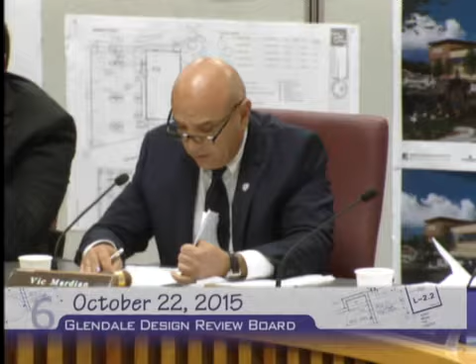The project site under discussion right now would be for a particular commercial development proposed at the corner of Pacific Avenue and Burchett Street, located at 707 North Pacific Avenue. The site is currently developed with a one-story commercial restaurant building, formerly known as the Marie Callender's, which has been vacant for a period of 2 years.

The proposal consists of demolishing the existing restaurant building and constructing a new 12,900 square foot building plus approximately a 1,600 square foot mezzanine. It'd be a drugstore with a drive-through pharmacy on a 1.1 acre site currently zoned C2 Height District 2.

If you don't mind, I'm going to go up to the board. There is an aerial picture here, and apologies because the dais is under construction - we do not have the computer system or the screen up available to show you an aerial image of the project site.

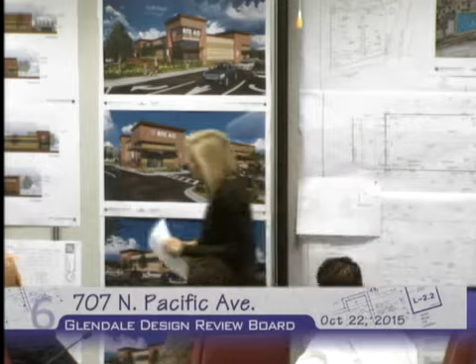You'll notice here's one site plan, and this perhaps is a little bit better of a site plan here. The restaurant closer towards Burchett is being replaced, obviously, by the Rite Aid.

The existing surface parking lot will remain as is. There are two-way driveways on Burchett providing access to the existing parking lot. The parking lot will be reslurried and restriped.

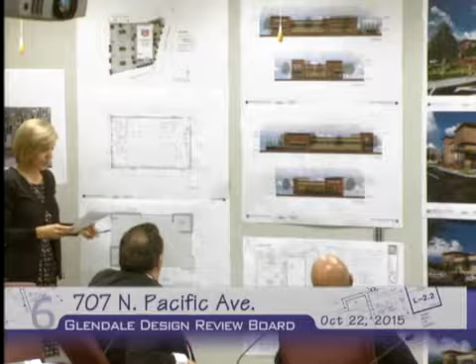The trash enclosures and loading dock are located to the south of the building along the rear, so essentially only the freeway on-ramp would see the trash enclosures and loading areas. That's specifically geared to provide all of the secondary access points, or the traffic and trash collection, away from the residential developments along Burchett.

Working in conjunction with the architect and the project team, staff has at this point in time developed street improvements along Burchett, which would help to alleviate the traffic flow and circulation of the use. Again, this is in regards to, I'll take a step back, there have been issues with traffic patterns on Burchett.

The applicant is now widening Burchett to provide a center turn lane traveling westbound on Burchett into the parking lot, and also widening Burchett to allow for a right-hand turn lane traveling eastbound on Burchett, south on Pacific. So these would help fine-tune the circulation and traffic flow both into the project site and out onto Pacific Avenue.

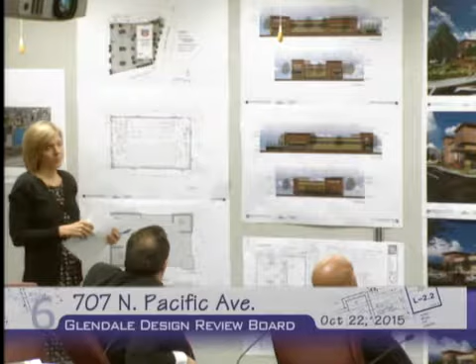Where is that occurring? Is that occurring basically to create somebody going westbound to be able to turn into the parking lot? Correct. So there is a small-scale shopping center that includes a Starbucks directly north of the project site.

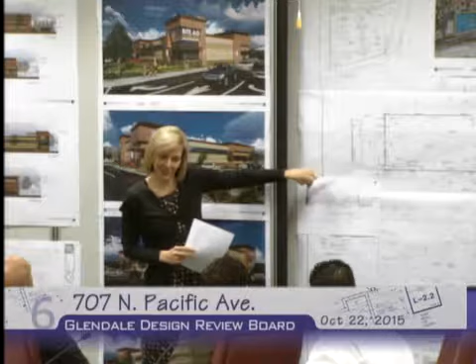If you'll notice here, and it's best seen at this location, what is being done currently is just one westbound, one eastbound lane. What they're doing is widening Burchett to allow for a center turning lane where cars traveling westbound can wait while traffic passes, still heading westbound, past the cars waiting to turn into the existing parking lot.

Any other questions regarding site planning or the circulation and public right-of-way improvements? How much actual dedication has been done with the realignment? It looks like it's not a straight line, so there's some curvature and all that.

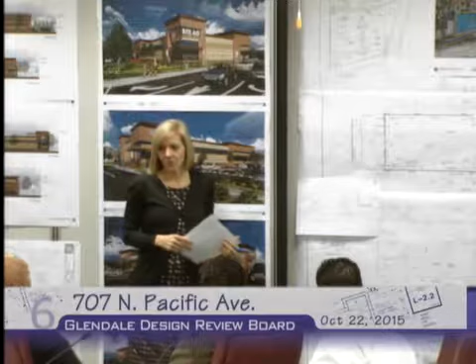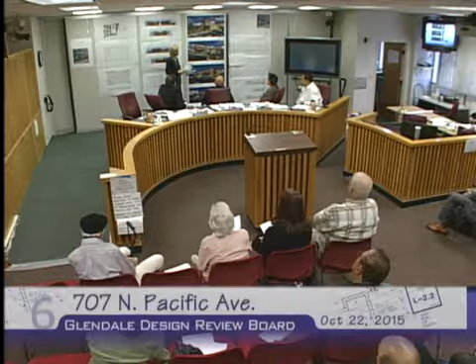It varies. So how much sidewalk do I have? How much setback do I have there? There is a 10-foot curb face to property line dimension, which would allow for a 5-foot sidewalk. And then they are required by code to provide an additional 5-foot setback along Burchett, so total from curb face is 10 feet.

To the property line, it would be 10 feet. It would be 15 to the building. Okay.

And the dedication that was provided for the turning lane, was that a voluntary enlargement, or was that something the engineering department basically asked for? That was in conjunction with engineering, with traffic and transportation. It is somewhat voluntary, working together with traffic and transportation. This is the plan that was ultimately brought forward.

So the island is actually in between those two driveways serving the facility? No, there is no actual raised island. It's just striping then. It would be just striping, correct?

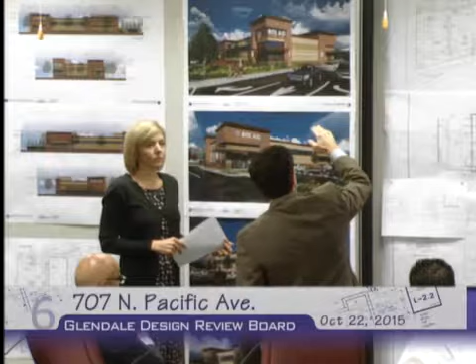Okay, all right. And this queuing lane that's created, at some point it turns into a left turn only, and then at some point it's to provide queuing as you're going westbound. So is it one of those S-shaped ones where half of it is for the queuing for folks traveling westbound to turn left, and the other half is for folks traveling eastbound to turn north?

Well, actually, the center lane is primarily for the traffic that is going to be entering and making a left-hand turn into the project site. Past the property, that center lane essentially goes away, and traffic is back to one lane traveling westbound, one lane traveling eastbound, with no center lane.

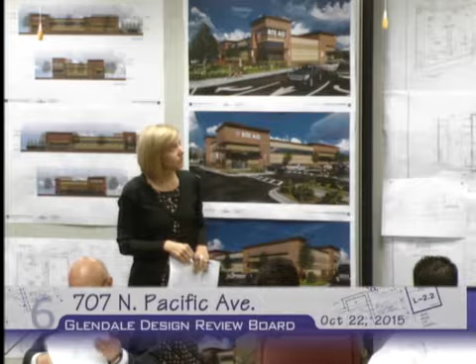So the dedication is solely on the subject property. You can see that the site plan almost shows three lanes once you go past the building.

I'm sorry, do you have the pointer? Do you mind?

Maybe the traffic consultant could answer these questions.

This turns left, and then this goes straight, and then this turns right. At some point, this portion becomes the queuing area for cars to queue up in the middle to turn left. And then all this leaves us with enough room for cars going westbound to go past. The applicant is also providing a right turn lane traveling eastbound and then turning south on Pacific.

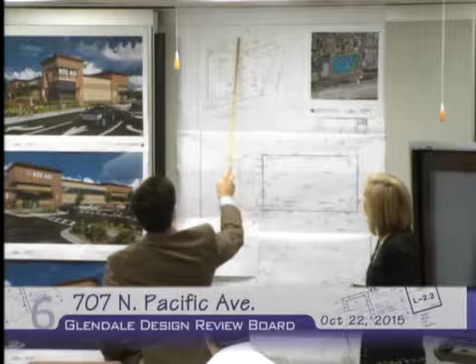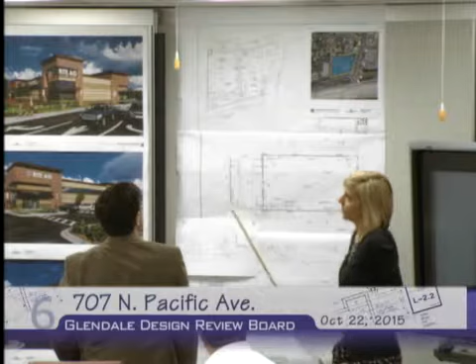This curb face here is this curb face. And then at some point, where the parking is the parallel parking, this parking would be right here. So this would be the Starbucks at this location with the seating, and this is the on-street parking. Then you'll notice it drops down, and then you have your single-family residential neighborhoods.

Can you clarify this for me? We're creating this right turn lane going south. Then we have this lane going straight. Then we have this lane going left. So where is the queuing occurring? Because this shows left lane arrow.

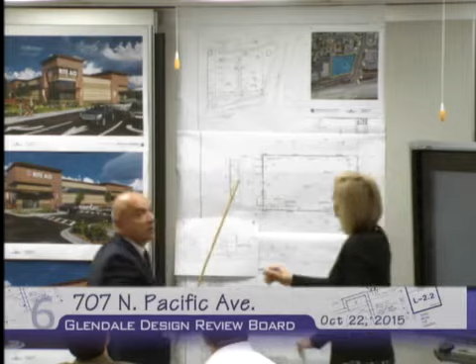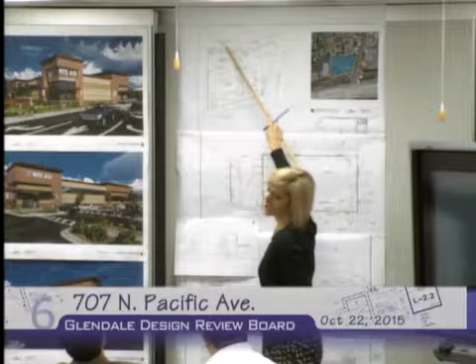The queuing is in line with that left turn lane. So if they're traveling westbound, they'd be going west, into this lane, waiting, turning left, south into the project site. It's an S transition at this location. How many vehicles can queue in that queue pocket?

That is a question to be answered by traffic and transportation.

I'm going to go back to that other question I had. I'm looking at this plan. It says 5-foot setback, then it's almost a 5-foot sidewalk. Where does the 15 happen? Right up here, unless maybe I'll ask the applicant. This looks like 5 feet, not 15 feet.

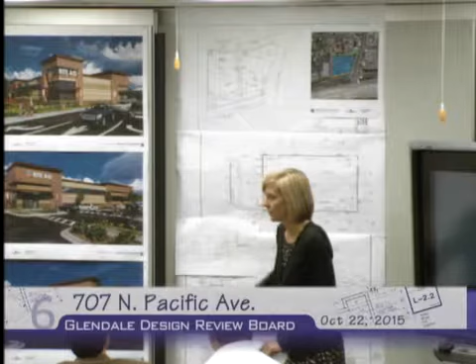It's not 15, then, you know what, you are correct, and I apologize. That's just a 5 foot setback to the front, to the property line, and then a 5 foot setback to the building. So there's not much dedication has occurred there. Most of the dedication has occurred at this location.

Any more questions? I'm going to look to the civil engineer to make sure that's the correct information. Any comments? Any other questions regarding site plan or the public right-of-way improvements? No? All right.

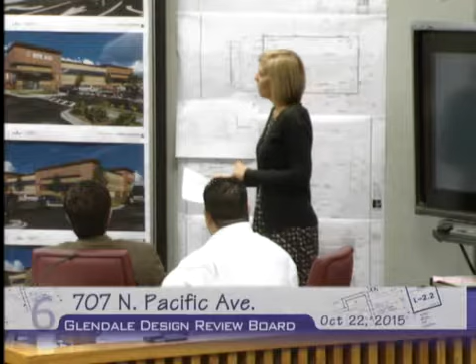The next scope within the staff report is the mass and scale. As you notice, it's a one-story building. The highest point would be this tower element at 30 feet high. The remaining parapet varies to the lowest point, which would be 22.9 from grade. This higher point specifically addresses the Pacific and Burchett corner. In terms of mass and scale, they focused the tallest portion of the building at the corner and varied the flat roof lines throughout the rest of the project, with the corner elements being taller and a lower parapet between the corner elements.

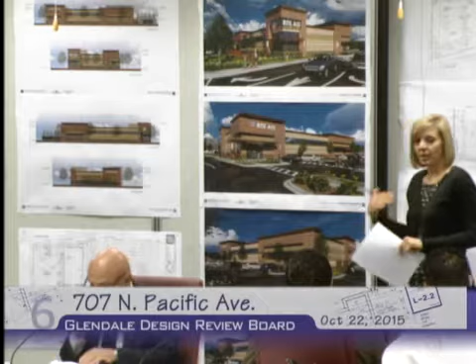There is a two-story commercial building directly to the west of the project. This mass and scale of the proposal is compatible with not only the adjacent commercial building, but also the single-story commercial buildings along Pacific Avenue. Because this is a heavily trafficked thoroughfare, the mass and scale is appropriate for Pacific Avenue, and then it transitions down into the single-family residential neighborhood along Burchett.

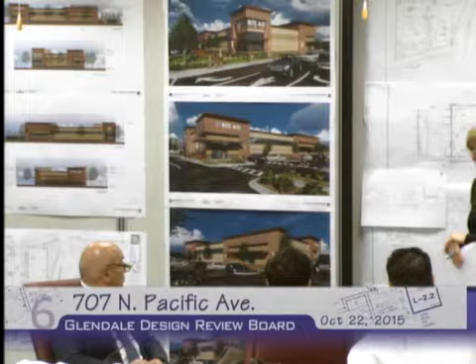Is there a question for Stone? Okay.

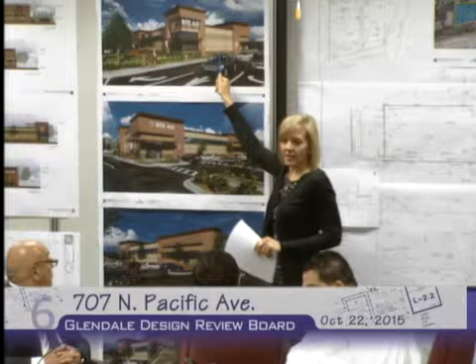The overall design of the project also helps in terms of breaking down the mass and scale. There are variations in plane and changes in material. The corner elements are treated primarily with brick facade. You'll have the walls and banding in between the brick corner elements treated in a horizontal banding type linear system to break it down and focus the eye on the horizontality of the project. The elevations also include vision glass and spandrel glass to soften the look. With this variety of materials and treatments and facades, the mass and scale of this rectangular building is broken down. The last topic in the staff report was design and detailing.

Again, what you see here is being presented by corporate Rite Aid. It's somewhat of a contemporary rectilinear building utilizing brick veneer, concrete block, spandrel glass, and vision glass.

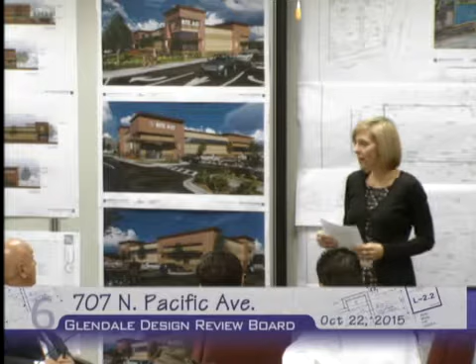They are including as the primary aesthetic these corner elements, somewhat more towered, that are capped by bands, which are also seen along the awnings. You'll notice that above the door spans and above the drive-through windows, you'll have the metal capped awnings. Overall, all four sides are treated in a similar fashion, so there is consistency throughout the entire building.

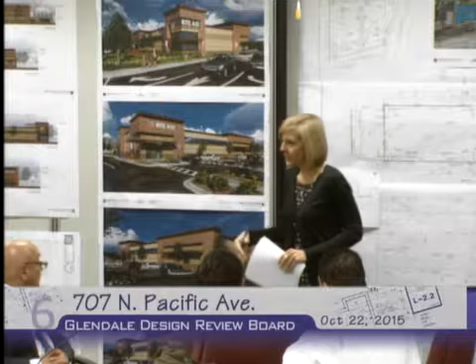The one item staff would like to note, and what we recommended as a condition of approval, is to take a look at the design and detailing of the front entryway. This front entryway faces Burchett. It's on the interior so there is access both from the parking and from pedestrians. But based on the overall look, there could be a little bit more design around the actual storefront system at this location. Other than that, staff had no other comments regarding the site plan, the mass and scale, and the design and detailing of the project.

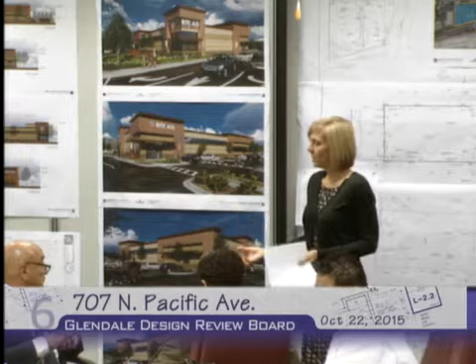Because the building was over 10,000 square feet in size, an environmental review was done. Staff prepared an initial study, which was circulated for the 20-day comment period from September 28th through October 17th. During that time, staff received 2 comment letters. Those letters were forwarded to you, and staff prepared responses to comments and forwarded you the final negative declaration for your consideration. The board has to consider the environmental review prior to making a determination on the actual project itself.

For the record, the applicant held a neighborhood meeting on the project site on September the 29th, so there was an opportunity for the applicant and the neighborhood residents to meet and review the actual proposal. That concludes staff's presentation. Obviously, there are many more details in the staff report.

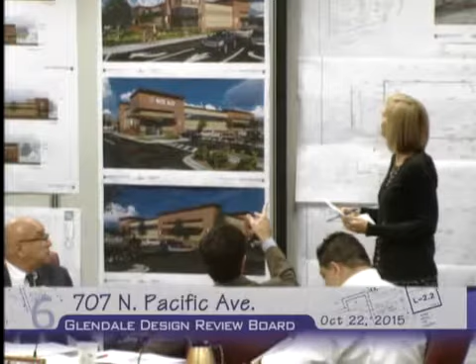So, is this a 24-hour facility? This would be a 24-hour facility, yes. And as far as the lighting of the parking lot, is there a plan to show us what that looks like? I will take a look at the project site, but all of the lighting as required by code must be shielded and turned away from any adjacent uses. Okay, so it would be directed onto the parking lot only.

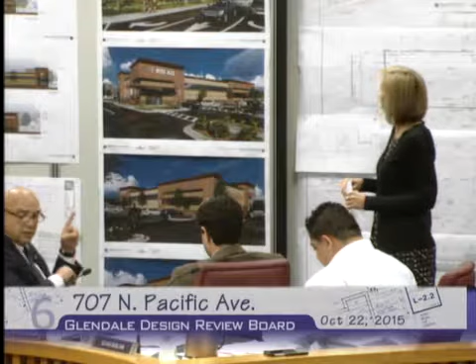Do we have a detail of the awning? If there was not one in the packet, I believe there were some details in the last few pages of your packet. I'd be more than happy to take a look. I'm looking at what I guess is their civil plan - those biofiltration basins. It looks like they're planters in some areas, but is that a drainage device they're required to have? That occurs in those 2 planters, especially the one up top there.

We can ask the applicant to clarify, we'll probably verify that with the applicant. All right, thank you very much.

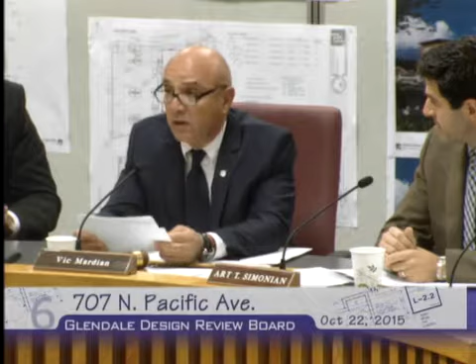Mr. Chair, on that note, I have a prior commitment to go to this evening, so I will be recusing myself probably around 6:45 or so. So I'm glad you're mentioning the 3-minute limit, and it'd be nice to go through the comments as quickly as possible. Okay, Mr. Simonian, we'll try to be out of here, and if not, we'll make it work somehow.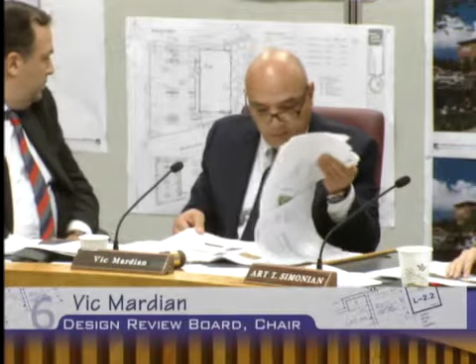Certainly. You turned in a material sample, but on the packet that I got, you showed split face on all of them except - actually, you show split face on all the CMUs, but I see the sample doesn't show it as split face. It's a function of what we can get from the block manufacturer at the time. But all the block is split face, integral color, and we've been very deliberate in our construction documents. You could see the lower sheet there, defining each row, each layer, so there are no mistakes.

This treatment, I appreciate this treatment. I've had experience with the roof treatment there. The material in between this, the cap or the band, is that metal too? It's metal, yes. It's all a metal coping, with a little recess there to create a nice shadow line.

But I'm looking at the roof plan. I saw two different roof plans. These are just parapets, wrapping around, thickening them, doing a parapet. I didn't see a volume of a roof there, or a tower, an actual tower.

Well, what we're doing is we raised all the corner elements. We figured that's where we're going to put all the mechanical equipment, so we don't have to create any false screens. The screening is part of the architecture itself, and you can see where we located all the HVAC units.

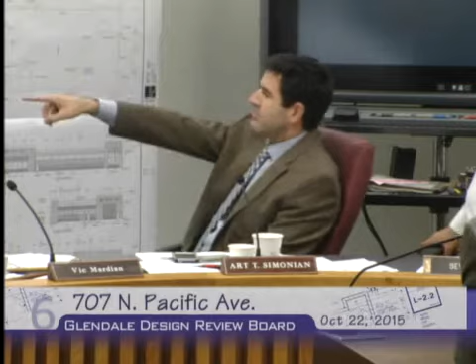There's a roof plan here, and then there's a roof plan at the lower left. Yes. The lower left actually shows actual parapets that continue within the roof and are depicted in the perspectives, whereas this roof plan doesn't show it. So which one is correct?

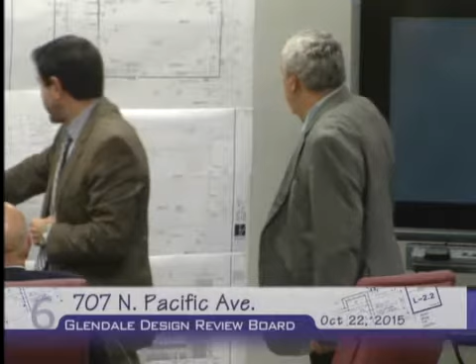You can come up, sir. I'm not sure what - I think he's talking about the middle of construction. Is this what you're talking about? Yeah, these parapets here. You can see on the lower left, the treatment here, this wall goes further, which then makes this perspective accurate, this is the view facing Pacific.

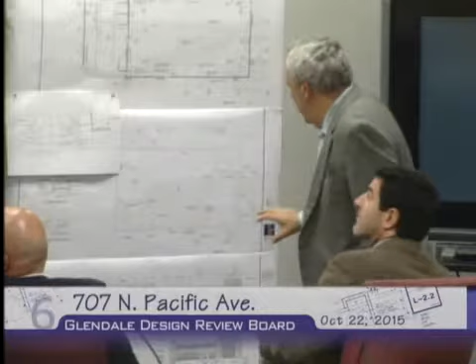And which one is correct, the roof plan or this? This is it. You understand, those were our schematic design drawings, and this is the construction document. So you are correct, we would extend that.

So which drawing should we look at today - ignore the roof plan? For the roof plan, this is the construction document, so look at this one. What else should we ignore? That was a design drawing. Are the top drawings above the roof plan schematic as well? Again, those schematic drawings - yeah, this is the site plan, this is the actual floor plan.

This shows the actual fixturization inside the store, with the exception of the loading opening. You have an opening at the back, but the loading area isn't shown there. Well, this is correct - this is the loading dock door and the access door.

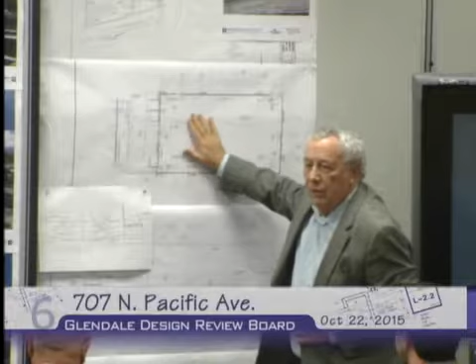Again, those were schematic, and now we want to make sure that the plan we approve—whatever this is the one you take to the bank, so to speak.

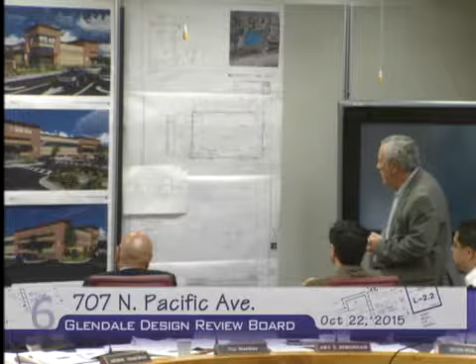And what do you propose? You mentioned the idea was to create more of a true tower element, and the intent was for that tower element to mask and screen the HVAC equipment. But that's the latest roof plan, and it certainly isn't in that spirit. So what do you propose, or have things come up that aren't indicated on this drawing?

We just need to extend some of these legs up this way, and we'll take care of that.

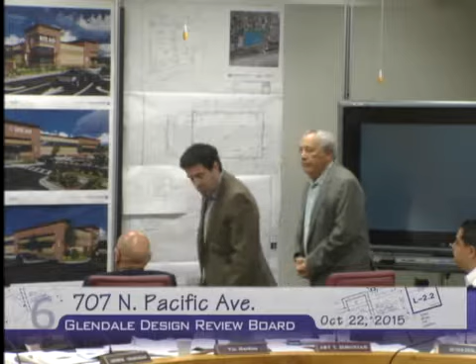This general coping that's occurring, is this with brake metal? Yes. And is this brake metal as well, inside? Yes, yes. And is that a Rite Aid corporate finish they're going after, or is that something the architect has come up with?

It's what we've come up with. If I'm not speaking out of turn, Rite Aid's prototype has changed a lot—it's a lot more contemporary. You know what most typical drugstores look like, I won't mention other names, but in general it's a knockoff Spanish style with huge entry volumes, awnings over plaster walls, foam cornices. We wanted to create a more solid-looking, clean building. Rite Aid is extremely pleased with the design.

Have you considered other coping designs? In a way it seems somewhat unfinished, so I wanted to know if you've considered other thoughts, or if you have other thoughts. To be honest with you, we designed it and we're very pleased with it. I'm not trying to be disrespectful, but that's the way we felt it should be.

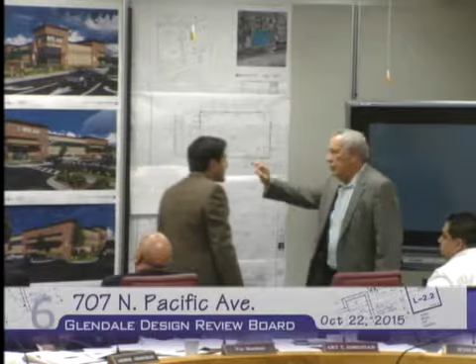And that top perspective, this white Rite Aid—is this hanging off the top? It's attached to steel tubes, and we have that all detailed in the construction documents. That's kind of our focal point, as Valia said—that's the corner.

And then there is a void space behind? There is, yes. So there's this tube steel that turns the corner, wraps around the Rite Aid logo and attaches to it. We're permitted one sign per elevation, but this way we're able to get both the Rite Aid logo and the sign itself in that one location. We have all that detailed in our construction documents—it's anchored back to the wall, and of course to the sides.

Do you have those here by any chance? I don't.

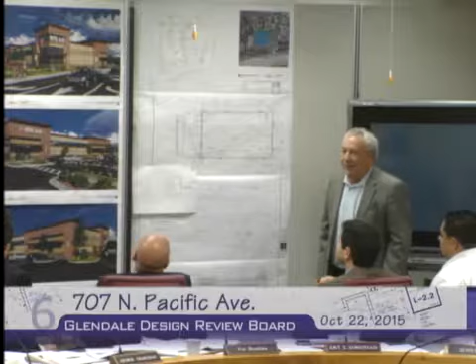Since we're talking about coping, I'm sorry to jump in—you have this detail here where you're recessing the coping, and it's different on each elevation. Is there a reason for that? We see it happening in some places and not others. We have two different towers, certain volumes. Some of the towers are different width, different height, different proportion, so what's consistent is the top piece. We're trying to vary it a little bit—the entry tower is a different statement than the other towers because that's our focal point, but the detail itself is consistent all around.

And what's inside the recess—is that metal as well? It's just lined with metal, same metal. Thank you for asking—there's no exposed plaster or anything on this project.

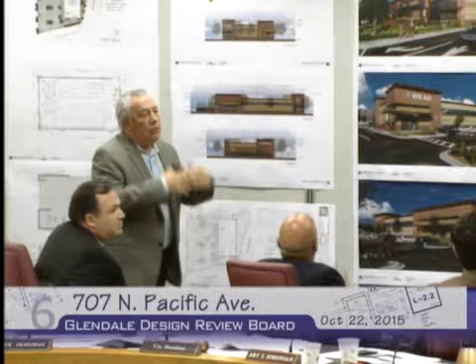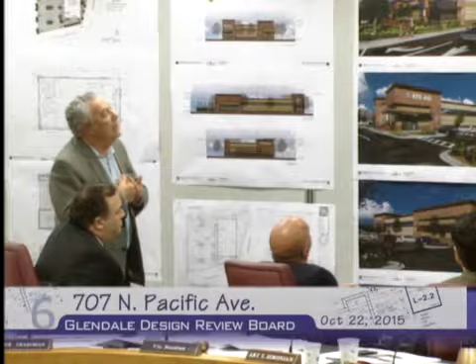About the corporate image, because I've seen similar buildings in other parts of the city, other cities—is this the material, the theme of the material that Rite Aid has? Yes. We developed the image design for this, but their latest prototype is about brick veneer, and I hope I'm not speaking out of turn.

We have a representative here, a construction manager from Rite Aid. My questions were answered. Okay. Thank you. Thank you.

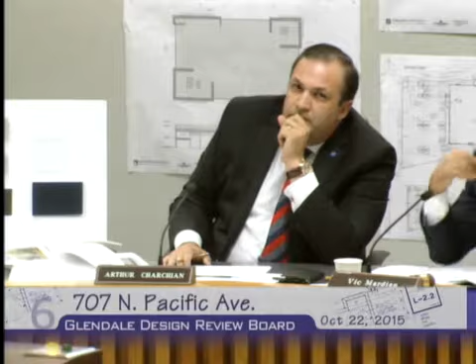I have a question, and I haven't had time to check it, but the water that's collected on the roof, is that directed to these catch basins, or is that directed solely to the rainwater system you're installing in the northeast corner? Yeah, the site's all surface drainage, but the roof is programmed to drain to the east into the infiltration basin at the northeast corner.

And that's a very large landscaped area, so it'll be easy to incorporate that. We'll also have a secondary outlet if that basin were to fill up. It'll get out to Burchett.

Mr. Valani, you have a question for the gentleman? I know it's not a straight line, but do you know approximately how many feet of dedication? Offhand, I know it goes from 0 to almost 11 feet as you get to the corner of the building. I would say maybe 400 or 500 square feet. I don't have the exact number.

Thanks. My last question is, are those the only ultimate locations for those biofiltration devices? Like I said, we have a couple smaller ones. But are those the only locations you can make it work? Yes, they're the site drains.

I understand the site drainage, but the reason I'm saying it, we have a huge parking lot. I'd like to get some mature landscaping that survives in those areas, because even the strip of the island separating those two driveways is very minimal landscaping. I can see it right here in this rendering.

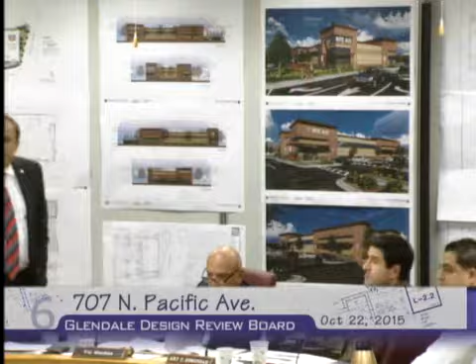Well, essentially, any time you have a driveway within a sidewalk, that creates a situation where people have to cross from one side of the driveway to the other. It's true of every market, gas station, theater parking, and shopping center parking.

So obviously, anybody turning in and out of a driveway has to yield to the pedestrians. I'm sorry, I'm not talking about people walking through the crosswalk, I'm talking about the entrance to the store - they are off in that area, walking in the sidewalk area, and they're on the property.

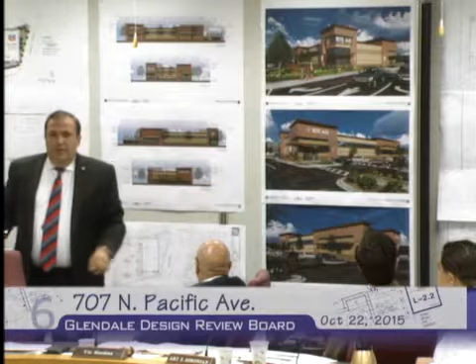A car driving west, there are two driveways. A car driving east on Burchett would probably use the first driveway, hopefully, right? The reason I ask is I've seen a lot of drugstores that for various reasons put these really ugly steel bollards in the front entrance, and we're dealing with a very visible, very close entrance to the street and to the turning radiuses of these cars. Unfortunately, Glendale has a very bad reputation for both pedestrian safety and these types of issues.

I can address that. Because it's an architectural feature - state your name for the record. Oh, I'm sorry, Albert Croft, again with Hirschman Architects. We are going to be adding a couple precast concrete bollards as protection for the entrance.

They haven't been shown on the plans yet. It was actually, frankly, a result of a meeting we had earlier this week. So they haven't been reflected, but we're going to update our construction documents. But again, you can be sure they're not going to be steel pipe columns - they're going to be nice precast.

So the answer to my question is you have considered the safety issues, and there are going to be some precast bollards in place to address any potential issues with someone maybe not making that turn properly. Absolutely. Okay, Jonna wasn't aware of that - it was literally a decision made earlier this week.

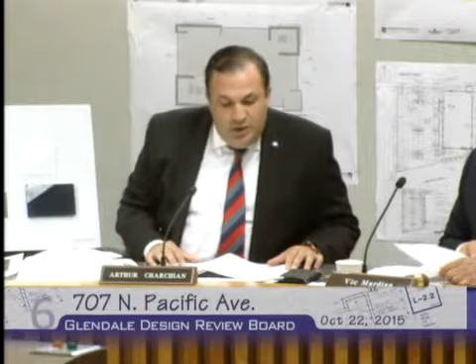I have a question for the parking consultant. Go ahead, unless anyone has more? I do, but I'll defer to your question as I formulate my next. I'm okay, sorry, go ahead. So my next question is in reference to deliveries and refuse pickup.

The deliveries are in the very back of the property, and the access point is one of the two driveways. In your study for the traffic flow that causes - because I'm assuming Rite Aid would get at least biweekly deliveries - have you thought about which of the two lanes they would use, and do you believe that will cause any traffic problems right in the parking lot?

I will defer to the architect in terms of the delivery entry into the parking lot, the delivery trucks, how they would maneuver in and out. That was designed as part of the site plan for safety reasons, because you want a delivery truck entering the parking lot to be able to back into the loading dock.

Do you have that? Well, yeah, it's in order - you have to come up here, sir. Croft here, I can address the safety aspect, but I just want to make sure to answer your question about the layout of the delivery.

In other words, I'd like to know - deliveries are going to come in one of those two driveways, right? And then the delivery trucks are going to have to back into that delivery bay. And so the same thing is going to happen with refuse, city refuse. I understand what's your question - we did provide, even for Rite Aid, the truck turning radius diagram.

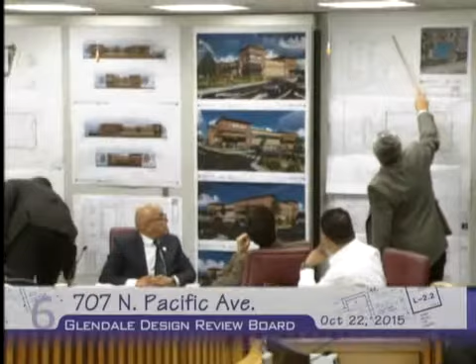This is not the architecture plan, but trucks would be coming in off of the intersection here, coming off the freeway. They would come in on the first driveway only, and that's what our traffic pattern shows. They come in here, turn in here, and this is even extra wide with a striped area with no parking. Trucks would come in, there's plenty of room, they'd back into their loading area, and they actually have the option to exit out the same driveway or this one. We can't control which driveway they exit, but they would absolutely come in on the first one, so that's the path of travel.

And we provided Rite Aid with a computerized turning template for large 18-wheelers, because we need to make sure that our design works, that our layout works.

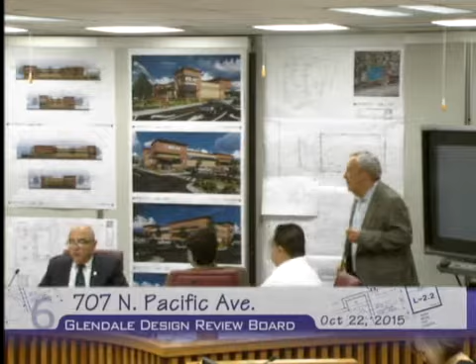You said there's a consultant or rep from Rite Aid here as well for specific questions? Each truck, depending on its size, they use the larger trucks typically for deliveries, and there are turning radiuses you can lay out on the site that tell you if the truck and trailer will be able to turn or back into a loading bay. So that was done by the architect, as is typically required for the design, to make sure they will be able to accommodate that turning radius in the lot.

And from a safety perspective, you have considered this in your study, considered that these trucks coming onto Burchett and entering the Rite Aid parking lot will not create a significant safety or traffic issue.

It is very typical. Majority of markets, Home Depots, or Rite Aids all have, at some point, to the extent possible, controlled delivery timing so that it's not at peak hours. I will not say it will never happen at peak hour, but in most cases they have delivery schedules that won't interfere during peak time when there's a lot of parking and pedestrian activity, and they'll be able to come in and out. The frequency at a Rite Aid of this size is not as many as you'd expect at a larger food market or supermarket with a lot more deliveries.

I'm sorry to harp on this issue, but I'm very concerned because Burchett is a very unique street. There's the very, I'd almost call it historic shopping center where the Starbucks is—I think it's a 1920s center that's seen many facelifts and has a unique cutout for parking that backs into Burchett, so you've got to be very careful there. You've also depicted an island, or at least an area demarked for safety purposes for that left turning lane you're creating.

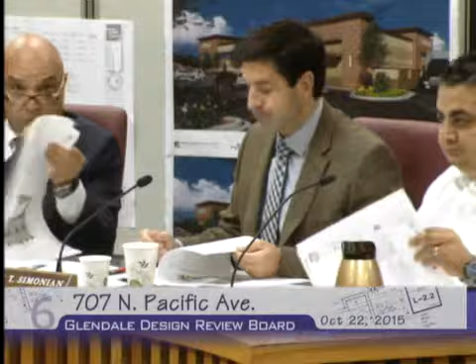I look at the plan, it's 14-foot ceiling height, Mr. Bowman. Yeah, 14 feet. You have a question, Mr. Simonian? Well, it was in reference to this ceiling. It's 14 feet, that's what they're proposing. To the drop ceiling? Am I correct? Maybe the architect can clarify, I'm looking at the sections.

Sheet 12. I'm not sure what that sheet says, but our typical sales floor would be 11 foot 10, so we don't carry that much volume. Because I'm looking at this elevation here, but we'll bring you back. I need to go to the public first, but we'll clarify that when you come back. I'll give you time, any questions?

I have one last question. We've heard of this being a prototype. Is there any other exterior design that Rite Aid uses other than this brick veneer?

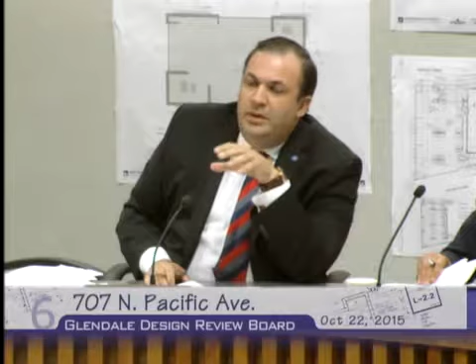Yeah, we use a variety of other architectural treatments, usually driven by the jurisdiction. If they had a certain theme they were going for, we utilize masonry blocks, split face as much as possible, because it's not only structural but decorative. If we're in a shopping center, we follow their theme, cover with stucco or plaster, all sorts of iterations, but we primarily try to go with the block and integrate the special architecture.

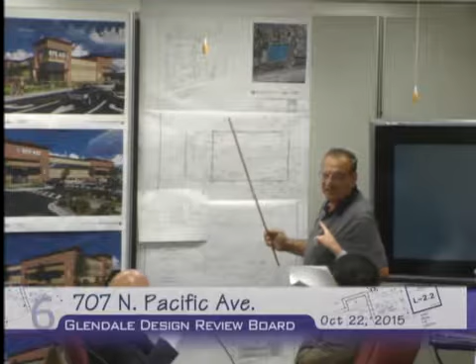Are you, sir, I'm sorry, you said hang a left, but that's the exit of the freeway. That's the exit, yes, but it's also the on-ramp to the freeway going this way. You got to go further down, under the bridge, you pass under. Still, you do need an extra lane in here. Yeah, you're right, you're correct. This is the exit. Where's the on-ramp to the freeway? Right here, you're on it, you're planning on it, okay, that's the on-ramp. But you do have this problem. That's a 5-foot setback he's got there. Yeah, I can see, very good.

Over here we can live with this maybe, but over here you need something to resolve this other problem. You need 2 lanes. If you don't have 2 lanes, there's no way you're going to be able to resolve this freeway.

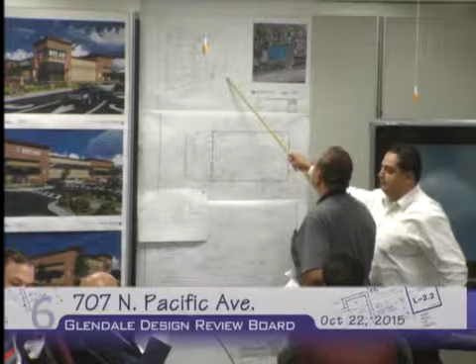Yeah, this is the on-ramp to the freeway. No, that's the on-ramp, but there's an on-ramp in the front. This is the 134 east, you exit the off ramp. The on-ramp happens somewhere around further here. Okay, okay, I lost that area. Are we done, Mr. Kazazian? Yeah, done. Sorry, I got turned around over here.

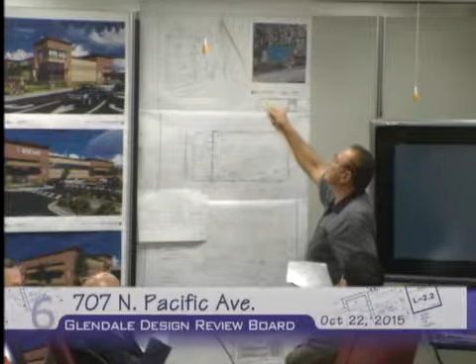But this area, you have to widen. Remember, Starbucks lost 7 parking spaces. They used to have 7 additional parking spaces, and the city took it away from them when they redid this intersection. That's why they're also short. Before, they used to have additional parking spaces that they lost. So they're strained, and you do have a problem with closing a business down. It's not going to help unless you resolve this intersection and give them more parking. Somebody has to work on that.

So your concern is the intersection, you have no issues with the design or anything? I'm not going to comment on design, that's your job to do. I'm not going to say anything about design. Traffic is my main concern, and getting on this freeway, it's almost impossible. In the mornings you can turn, of course, which you have no choice, into the on-ramp. I need to go to the other side, but look into that. Thank you.

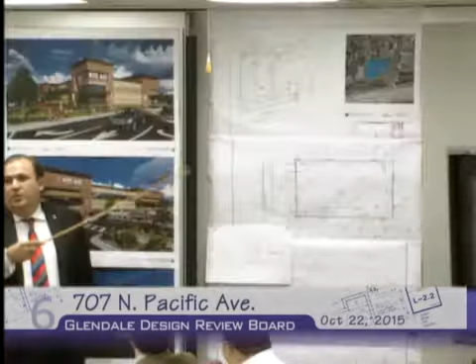For those in the audience and the viewing public, when we're talking about widening, it's not just here that we were talking about earlier in comments—you're also widening here 5 feet, correct? Yes.

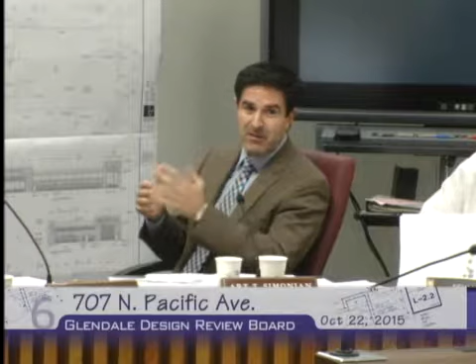Some of the comments that were raised by the other board members as far as providing more ample landscaping within the parking area certainly has some merits to it. And that comes with weighing in the fact that obviously with more landscaping that we provide, the more parking is going to be lost, et cetera. So there's a give and take with that as well.

The architecture in itself, though, I think seems a bit value engineered, I guess the only way I could really describe it. I think it could benefit that neighborhood and that intersection by having more materials, more color variation, and perhaps not as heavily weighted towards the brick veneer. That brick veneer in itself is a bit overplayed in the design.

But again, those are just design-oriented features, not so much what the overall layout, circulation of the project seems to be working. The driveways, the way they're oriented, seems to be working, coupled with the improvements that are going on or going to occur. And so the way the truck is accessed and the way the trash is accessed is done properly at the rear of the building, so it's not visible really to the neighborhood. And so circulation-wise, that works.

The driveway is again pulled away from the intersection, so as you're going northbound or southbound on Pacific, you're not going to see the drive-through. And that's kind of on the west side as well, which is nice, because you don't see the cars queuing up along Pacific. So all these things put together, coupled with the fact that now with all the dewatering regulations that the county has, that takes up that hard corner with where that depressed planter is, starts to kind of define the direction they've taken.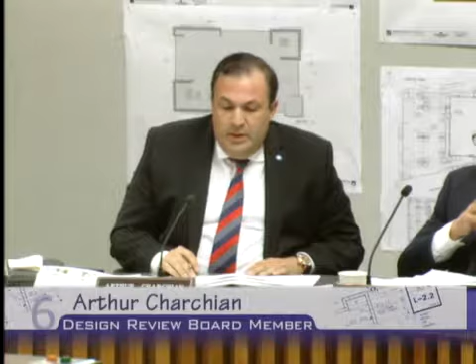I'll keep my comments short since a lot of what I was thinking has already been mentioned. I'm sensitive to the value engineering because I understand there's a certain cost effectiveness to these things, and also concerns with potential vandalism and transient-type issues that tend to plague these types of uses.

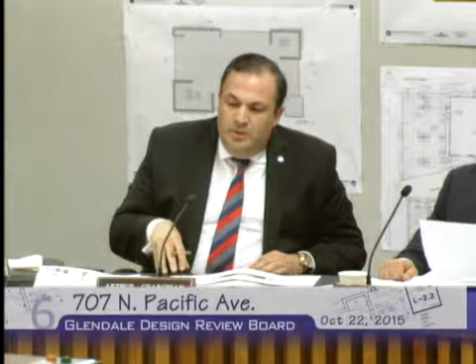I support the traffic studies. I wanted to make sure it was very clear that the additional 5 feet was there. The site plan overall, I think, would be a successful use. I'm neither here nor there on adding landscaping, though I think some shade trees would be nice for various purposes.

But my main concern is the overall look of the building. I can appreciate that Rite Aid Corporate has a certain look they want, but as the representative indicated, there are multiple variations Rite Aid is okay with in other areas. This just happens to be one of the ones they use, and the horizontal banding with the different color block—I have issue with. I don't think it's very appealing.

Regarding the comments about the location of this corner, a large number of Glendale residents and visitors will see this location as they drive by. I would welcome the applicant to reconsider the facade of this building. Since we're going in a direction of material change, and we're okay with the mass and scale, how do you want to approach this—do you want to see it come back, or do you want to suggest something?

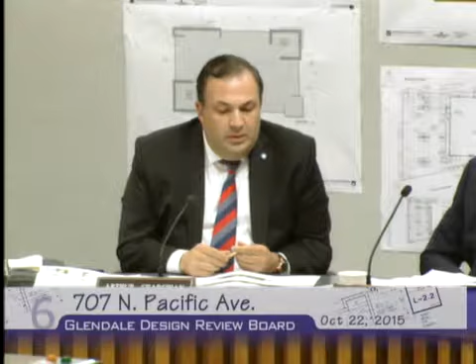I think staff could work with the applicant to curtail the facade. The suggestion of a composite metal facade instead of brick veneer is a good one. Breaking up the volume with something other than horizontal striping could be achieved, and those could be worked into conditions. I don't think a redesign is necessary unless you'd like to see one to know what that looks like, but for my purposes, I think staff could work it out.

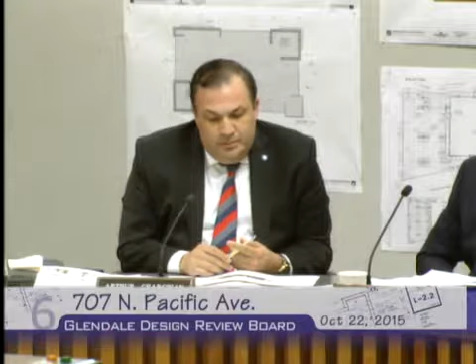Okay, thank you all. Anything else you want to add? Just as a follow-up, I think those rotundas—how they're dealt with and how they actually screen the HVAC behind them—and trying to create more of a special rotunda at the hard corners as opposed to the rears, would be a nice hierarchy as well with the metal siding.

I concur with all the comments. I do agree with the traffic analysis. I think the applicant has done the best to align the street. A similar project occurred down on Pacific where the new Starbucks is—that whole street was aligned in a similar fashion.

I don't know if Mr. Giano remembers that or not. We had to realign to make that corner work better, and I think it has. I trust their judgment—it's gone through a lot of processes with city staff to get to this point. And let's keep in mind, something has to happen to this property. It's been vacant for a long time, and they are dedicating.

I know the community is questioning the traffic, but this side of the street is trying their best to make it work. Hopefully one day there's other things that occur on the other side, and they'll widen that side. It's hard to come back and take everything from this applicant. They're already trying to do their best.

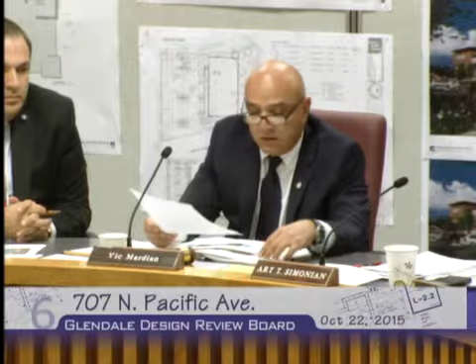But I'm going to go back to design. My concern is I want to make sure these awning details are properly shown on the plan. And I think the brick is overwhelming, especially on the main entry. It should be a different material, maybe aluminum, or something to soften it up.

When you're doing something like this indentation, I think it's very minimal, especially when it's brown, I don't see it. Maybe another foot to it could help, and maybe change the color to give it a little more relief, and make that entry more transparent.

I think your new proposal is - I know you want to keep the building concrete block for value engineering, but it's too solid. It needs to soften up a little bit more.

But I do emphasize on those roof towers. They should continue all around so we don't see the openings, because it is a parapet. And the overhangs should be extended further a little bit more. It just feels like one square now.

Another foot to the overhang will add to the edges. The roof overhangs? Yeah, the roof overhangs. I think that will help the building even further.

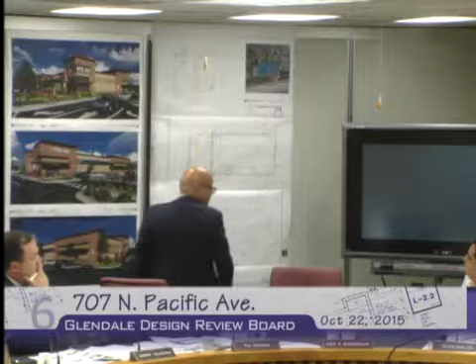So you don't have dead-end driveways. Correct, he doesn't have a dead-end driveway. He'll come in and go out this way, so no one's circling. That's good traffic, that's good circulation.

I wish Board Member Simonian had stuck around for a minute. He was looking for a refinement to the roof copings and the flat roof with tower concept, and I wasn't sure exactly where that was going, but I think it's through a continuation of the cladding of the whole block.

In general, the board is looking to see higher quality or different, softer kinds of cladding materials, particularly at the corner elements, to move away from the brick cladding, and also to find ways to avoid the horizontal striping as much as we have on the building. One possibility would be to include burnished or precision block where block is exposed, and incorporate more stucco on the walls, especially at the entry corner and possibly other locations.

There was also talk about metal cladding at the roof, if those roof projections at the corners remain, to find a way to emphasize the indented portion through either size or color. It definitely needs to get a little larger, yeah, taller, and or different color.

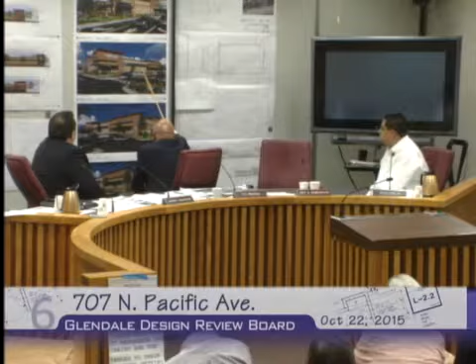And then I had a question for Board Member Mardian. You mentioned the concept of softening the block walls, and I wasn't sure what your thoughts were. If we're going to stay with block walls, maybe split face is too much, get rid of some of these lines. But if they want to do stucco, that's fine too. I don't think I want to see split face on this building. Yeah, no, that's definitely clear.

I think by the new revision, extending these eaves a little bit more and popping this out gives you a little better emphasis on that tower. And the same thing with these overhangs here, they should be maybe another 6 inches or so. Since we're talking about that coping area, if they keep it consistent throughout.

Throughout, yeah, not have the indentation somewhere and lose it there. I'm fine with that, actually makes it a little different. Fine with mixing it up. Mixing it up is fine. I'm fine with mixing it up, as designed. And then it's just extending it a little more to the eaves.

While we're focusing on those corners, is there concurrence on Board Member Simonian's concept of a more signature tower at the corner? And if so, do you have any ideas?

I think height at that point is 29 1/4, so about 30 feet. So anything more mass there would not be something I would support.

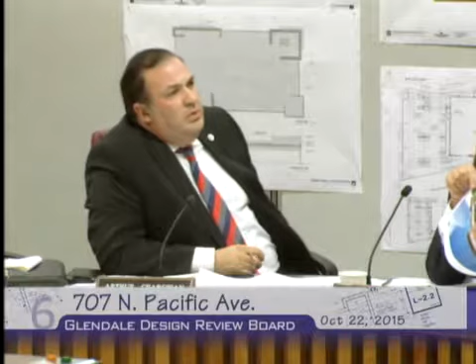I think that could be achieved by a change of materials, and then also the extension of the roof cap so that we have a little more termination at the top. Okay, so we will get rid of that.

That's everything I had. Okay, I would like to go to Mr. Platt on the first item that you mentioned, the lighting.

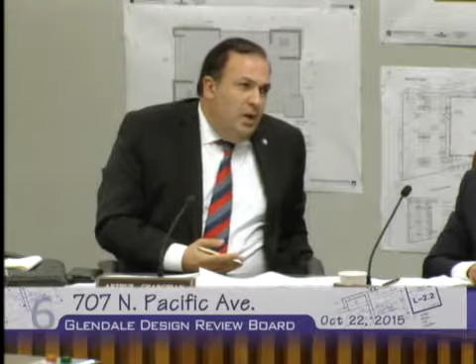The lighting, I think the concern there was because it abuts residential, especially at the driveways. My concern was to make sure there's no overflow of lighting to the residential, and that was before it was disclosed this would not be a 24-hour store. So we would want a lighting plan for when the store is open and operating, and a slightly different plan for when the store is closed, to minimize it further, but keeping in mind there are security concerns at a store like this.

Yeah, I mean, it's likely they'll want lighting throughout the evening. Yes, and that's a standard issue for us, to shield light fixtures where they abut residential areas, but we'll make sure it's in the conditions.

It's commercial next door. No, above here, there's four residences directly across the street, so they need to get it addressed. We don't want floodlights going into their front yards, because that would be bad.

Anything else? Other comments? No. Make a motion. Oh wait, the board actually has to certify first. You would have to adopt the negative declaration first.

I had one thing. I don't know if you haven't checked the box under public services. With this project, substantial adverse physical impact associated with the provision of new or physically altered government facilities. Is that supposed to be marked? Which page would that be? Page 25.

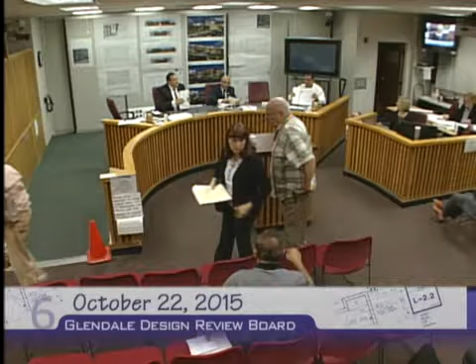Thank you. All right. The next item on tonight's agenda would be the minutes from September the 24th. And I believe board members Benlian and Mardian were present at that meeting.

We can do it? You can do that. You want to make the motion? I'll pass the gavel in a second. Sure, I have a motion by Chair Mardian and a second, I would assume, by Board Member Benlian. I'll go ahead and approve. Thank you, there you go. All right, okay.

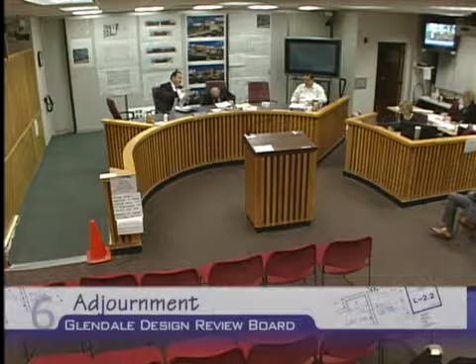And there are no other items on tonight's agenda. Is there a motion to adjourn the meeting? Motion to adjourn. Thank you. All in favor? Aye. Thank you. All right, why did I go on record?